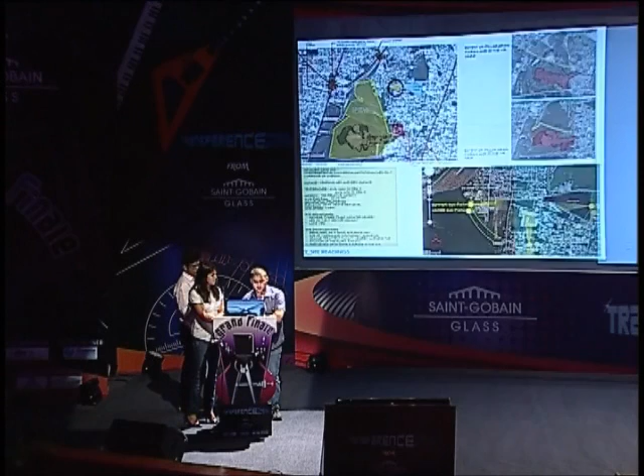Now we move on to the concept slide. Through a timeline, we have tried to build a story as to what will happen in the future and how the architects should react to the situation.

Way back in 2000, Perungudi was a small village which inhabited 8,000 people where they coexisted with nature, that is Pallikaranai Marsh, which was rich in flora and fauna.

Currently, due to development of an IT corridor, the city turned into a business hub leading to an influx of population which is now around 36,000. The Pallikaranai Marsh now acts as a garbage dump yard for the city.

With the IT sector booming, the estimated population by 2050 would be more than 2 lakh. Old and slow methods of construction will no longer be able to sustain the high density influx. The energy sources will eventually be depleted while the amount of garbage will increase manifold.

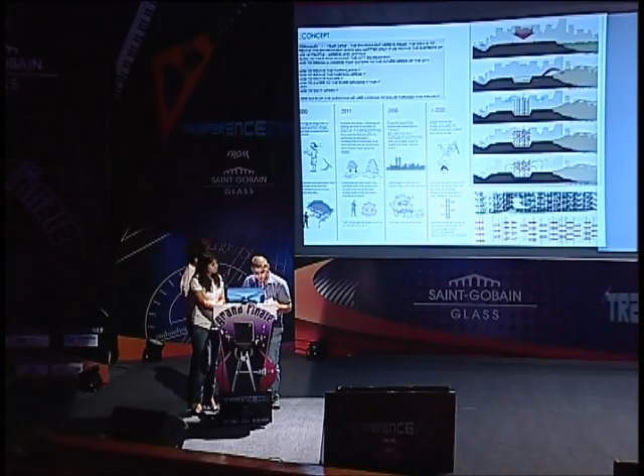In the second graphic, we are proposing a vertical land use system where we have a sewage treatment plant below the housing. Wind stacks are used to harness wind energy. The formal image of housing is a pixelated skyline with each module comprising prefab units to speed up the construction process, and in the end, incorporating green farming slabs vertically.